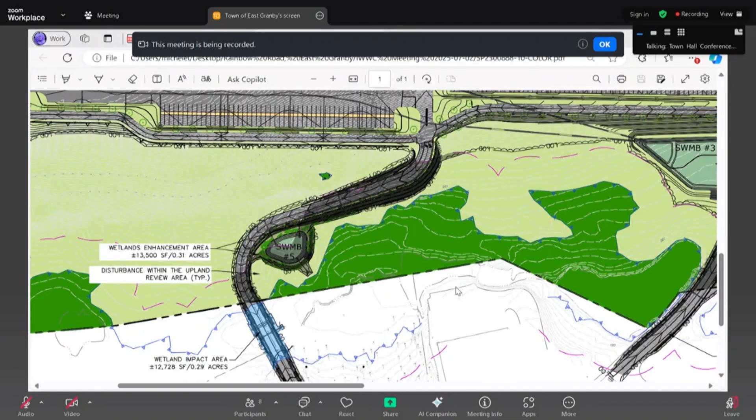So looking here at this driveway location, we do have a few different options of where it could go, but like I mentioned, where we placed it is the narrowest crossing point of the wetlands that we have access to. We did explore a couple options that should be in the application package. Essentially, looking farther plan right here, it's just a wider section of the wetlands.

So for that driveway, we do propose a new box culvert. It's actually 2 barrels wide, so it provides adequate flow, but we also specifically chose a box culvert so that it promotes and allows for free passage of wildlife. We didn't want to go with a pipe system because those can be a little bit more restrictive for wildlife passage.

So that's the main impact for the wetlands there. That's about 98% of the direct wetlands impacts. There's a very small sliver of wetlands impacts on the plan north side. It's associated with a velocity dissipation measure for the outlet of one of our stormwater basins.

Our outlet pipes are strategically placed so that we maintain flow towards the wetlands to maintain their current functions and values. But we did want to provide protection measures at the outlet so that we slow down the water so it's not flowing out rapidly, and allow any sediment to settle, as well as kind of level out the flow so it can convert into sheet flow. So we've got, I think it's around 50 square feet of impacts on the plan north side just to fit in that velocity dissipation measure to protect that area.

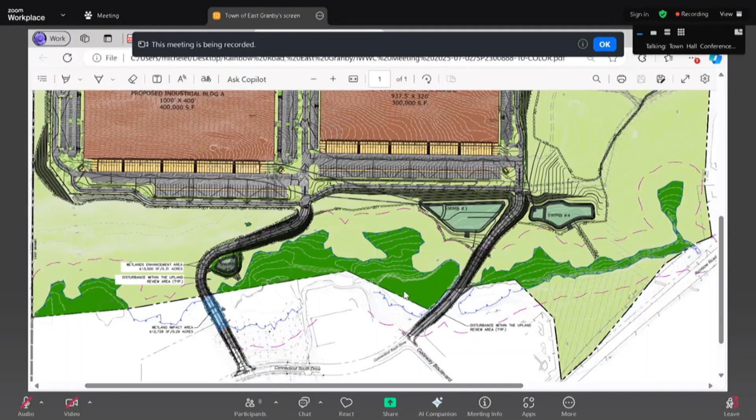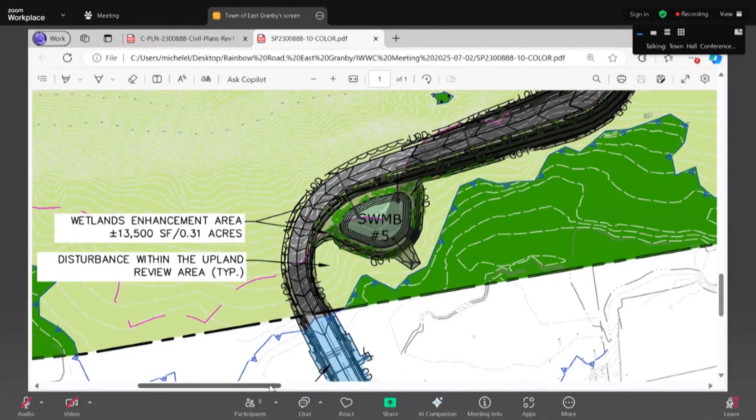And then, as mentioned, we do have some enhancements. Specifically, they're focused around one of our proposed stormwater management basins. It's at the bend in that southern or plan left driveway. So there's kind of that bubble right on the inside corner of that driveway. That's a stormwater management basin specifically intended to manage the runoff from this driveway.

But we chose that area strategically for the wetlands enhancements because it is very close to the wetland resource area, but it also will experience repeated stormwater flow from the drainage system. So we were able to place strategic plantings in that area and select the varieties very carefully so that they are wetland friendly. It can essentially function as an extension of the wetland, but because it has that continuous flow from the stormwater management system, it will really increase the likelihood that this enhancement will be viable and sustainable long term. We didn't just want to plunk an enhancement off to the side somewhere on the site near the wetland boundary. This area really does have that stormwater flow to maintain its viability long term.

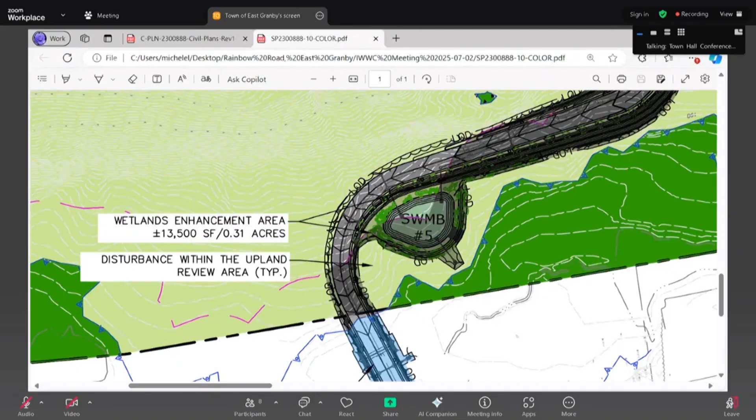If we can zoom out a little bit to see the entire site, I want to touch on stormwater for the site as a whole. So this site does have 5 total stormwater management basins. Essentially, we're collecting all the runoff in deep sump and hooded catch basins. So the sumps and hoods will provide that initial treatment for suspended solids. It's all an underground conveyance system. So it'll flow through pipes into the infiltration basins.

On the front end of those basins, we do have sediment forebays to provide another level of initial treatment for suspended solids. And then through the remainder of the basin will be the infiltration practice, as well as providing the remainder of the treatment in compliance with the Connecticut Stormwater Management Guidelines, the latest issuance, which is effective in 2024, that will provide the adequate pretreatment for suspended solids as well as nutrients such as phosphorus, nitrogen, and similar, so that by the time the water is infiltrated, it'll meet or exceed all the treatment requirements set by the state.

Those basins are sized for all of the design storms required by the town regulations, as well as the state of Connecticut stormwater guidelines. Essentially, that's all the critical design storms up to and including the 100-year. So the increments that we review are the 1-year, 2-year, 5, 10, 25, 50, and 100-year storms. And so essentially, the easiest comparison is that the 100-year storm is a probability of this storm happening once in 100 years. So for comparison, that's roughly 8.5 inches of rainfall in a 24-hour period.

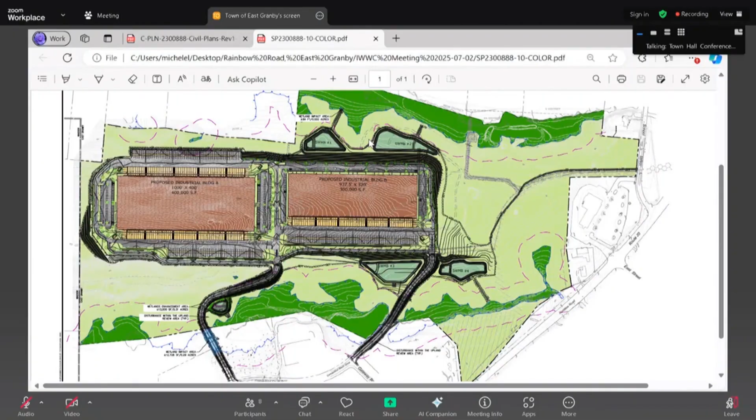We do have lighting along the driveway, so there will be some limited illumination within the wetland and the upland review area, but those lights are strategically placed and kept with shields and to as low height and foot candle as possible so that there's limited spill into the wetland, but we do still provide adequate lighting for traffic safety. We want to make sure it's a safe driveway for traffic circulation, especially the southern driveway with that bend, we want to make sure that's illuminated so it's safe for all users of the site.

We also included a comprehensive landscaping plan. From a wetland standpoint, it's centered primarily around that enhancement area. They are all native species, primarily a mix of shrubs within that area, all able to thrive within a wet foot condition as they would experience within that stormwater basin. There are a few trees scattered throughout that enhancement area as well, primarily river birch and swamp white oak.

There are a number of other landscaping measures throughout the site. Just for order of magnitude, it's close to 300 trees, a mix of evergreens and shade trees. So we do have a number of other site improvements from a landscaping standpoint. Some of the disturbed areas within upland review that are not proposed to be landscaped or hardscaped will receive either a lawn seed mix if it's right next to the roadway or a conservation seed mix on the slopes and some of the bordering areas.

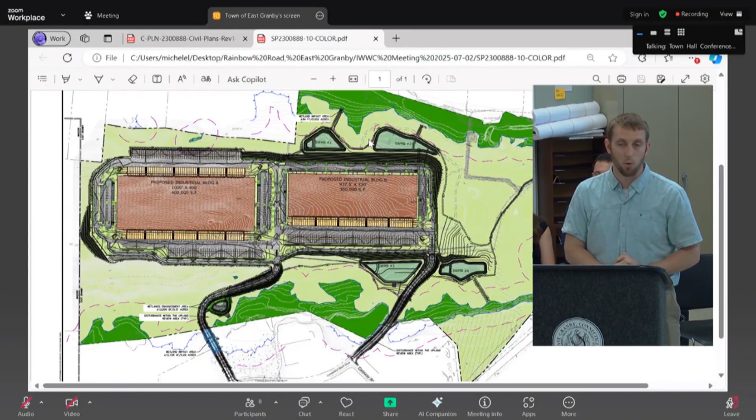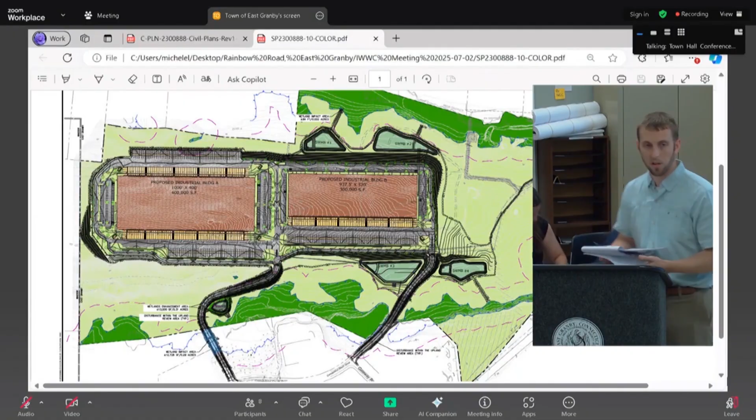Long-term, some of those open spaces and more grassy areas will be allowed to maintain some of that wildlife viability. We did specifically choose a conservation seed mix so that there is the variation in vegetation styles, some wildflowers in there to support wildlife habitat, especially as we get closer to the wetland area. So I believe with that, I would like to pass it over to Tiana to discuss some of the wetland resources.

All right, hello. My name is Tiana Perini. I'm the soil scientist with JMM Wetland Consulting Services here on behalf of the applicant. And tonight I'm going to discuss via the project Rainbow Road, some of the wetlands, their function and values, and our approach to minimizing impacts and also some mitigation.

As discussed, there are two primary regulated resources. Sorry, the plan's going to be a little confusing for me, but if it's actually facing north, it's going to be our eastern wetland, which is a forested wetland with an intermittent seasonal watercourse and a man-made pond, as well as our western wetland system, which includes Sheldon's Brook, associated emergent marsh and scrub shrub and forested wetlands.

Within our eastern wetland system, we do have a noted vernal pool. Again, it is located within that water system. Then we have two isolated wetlands. One, a small man-made vernal pool in the southeastern portion of the site, and then an isolated wetland, not a vernal pool. It's an isolated depressional wetland in the southwestern portion of the site.

When looking at our function and values, the western wetland does have 7 primary function and values. We do have a chart provided in our report. I'm not sure if everyone had that with them tonight. That's a big one. This was in the original packet. Yeah.

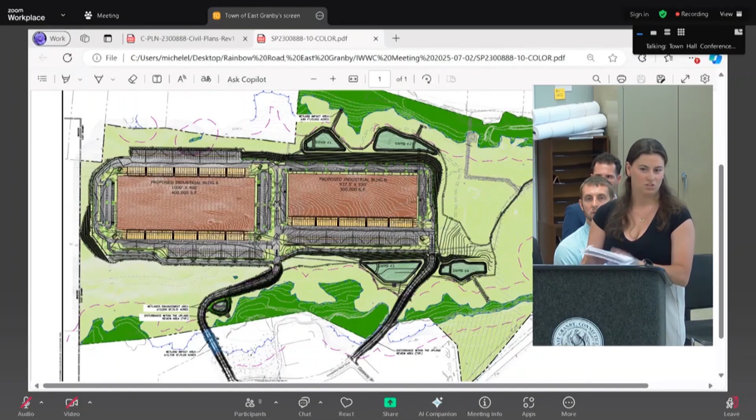Yeah. Want to go through, guys? Sorry, I don't have it shared on the screen, but just to reiterate, it is in the chart, so you can see it listed. If you need me to go into it, I'm happy to go into it. But in the western wetland, we have 5 principal functions. The isolated wetland only has 1 principal function.

These factors for the function values can be influenced in a positive way, such as the presence of multiple wetland types and the presence of the perennial watercourse, while other factors diminish the function, such as the proximity to the existing development, past disturbance, and an abundance of invasive plant species.

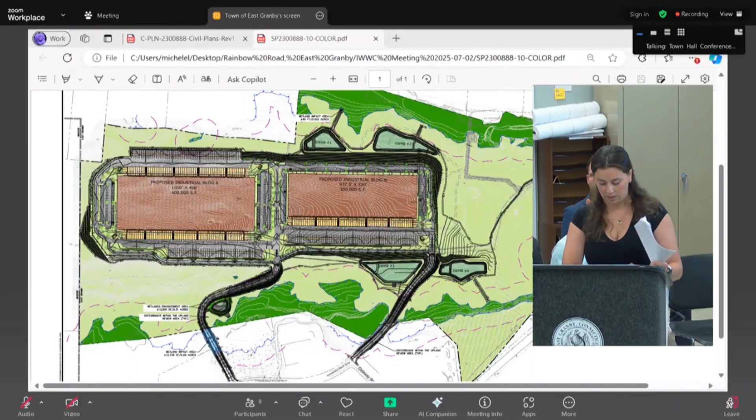When looking at the two vernal pools, we have vernal pool 1, which is our natural vernal pool located within the wetland system. We did find that this was the more productive of the vernal pools, with spotted salamanders and wood frogs. Vernal pool 2 is the small isolated vernal pool that was noted more adjacent to one of the access drives. This is again a small man-made depressional wetland, which did support some wood frogs and breeding, but is not considered a productive vernal pool at this time.

And we did 2 different site visits, as well as trappings, and multiple hours spent there to come up with these answers for you guys. When looking at our impacts, we look at 2 different types of impacts, direct, as mentioned, and indirect. Our direct impacts are, again, only a small portion, about 12,000 square feet, and are associated primarily with one of the access drives.

We do have, as mentioned, a mitigation plan that JMM is working on, and that includes native shrubs that will help restore some of the wetland areas and does at this time exceed the size of the proposed impact footprint. The indirect impacts are ones that are known to most sites: erosion and sediment, vegetation removal, hydrologic changes, water quality protection. With the plans that we have seen in place, with diligent supervision, there is only a moderate risk to erosion.

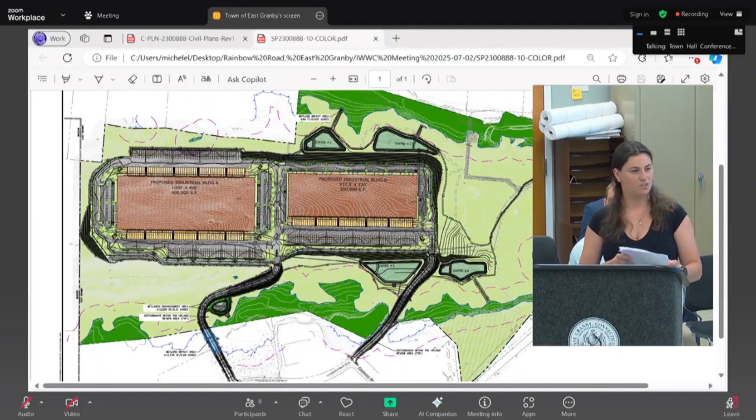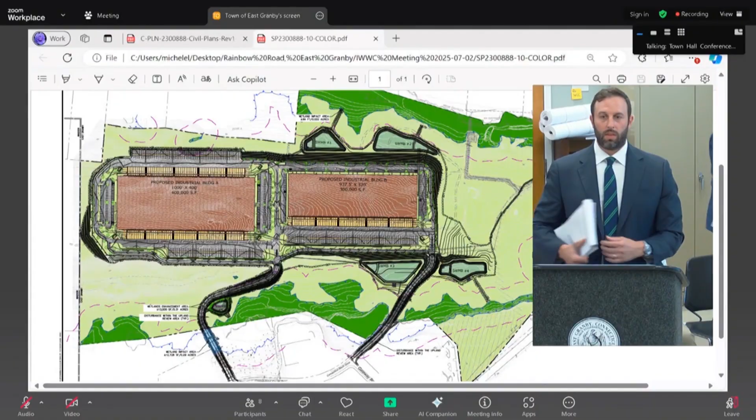So that concludes our presentation. I don't know if members of the commission have questions now. We're happy to answer them, or if you'd rather wait.

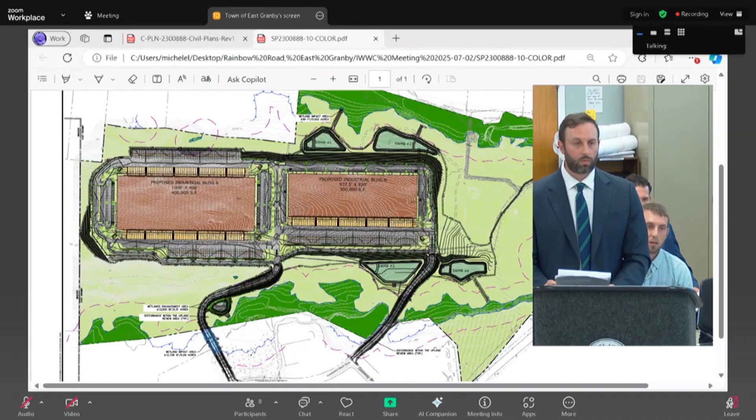So one of the letters received from Robin regarding the questions that have been asked by the town engineer: I read through all the questions that have been asked of the engineering firm, and I saw the responses from the engineering firm as of June 25th. I got through about 3/4 of them, and it seemed that most of the questions, specifically the drainage questions, number 15, 16, 17 A through C, 19, and 20, all said they'd be addressed on the next revisions. Robin said we expect that those would be presented to us by the start of this public hearing.

So we actually just received today, and Tim step in at any point, but we received today a new memorandum from the town engineer. And as part of that memorandum, he proposes several conditions of approval, and I don't know if you have this in front of you, but I wanted to read the final. No, the latest we had received was from June 30th. Okay, so this is dated today, July 2nd.

So it came in, I think, just a few hours ago, so we obviously couldn't get it out, but Tom Grimaldi, the town engineer, is on the call, so he's available and can answer questions and walk through the most recent memo that he provided, which is the one that he's speaking to.

Okay, so we don't have those answers yet, so we need to hear those answers. Yes, I think the plan would be for you to get them verbally. Yeah, because we couldn't get it out in the packet. If I could just read the final paragraph of his report, because I think that could be helpful, and then

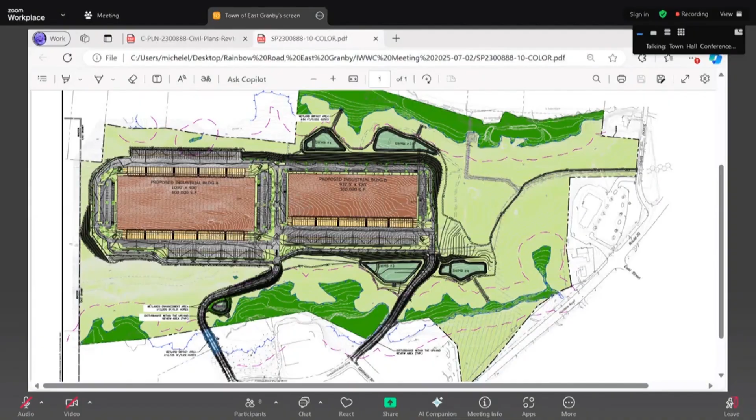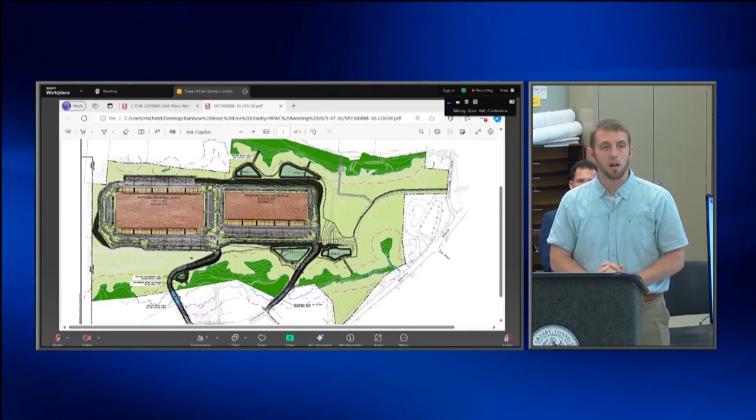However, where that basin is located and the design of it currently, we were able to just pick up the floor of that basin without any impacts to the upland review area or the wetland resource area as a whole. Basically, we had enough elevation to play with where we can just raise the floor slightly. The pond still holds the appropriate amount of water without increasing flows off-site. So you don't have to change the dimensions even though you're making it more shallow? Correct. We actually got better infiltration results. Okay. In that area.

GEI wasn't able to reach that area previously because it was pretty wooded. We were able to go in there with an excavator and carefully pick our way through trees to create some space for testing, and we found a very nice pocket of sand. Previously, it was kind of like a sand and silt mix in some of the areas more on the east side, which is the plan right. As we go farther plan left, we get into more of a sandy, gravelly mix, and where that basin is located, it's very firmly within that sand mix. We actually got field tested rates in excess of 10 inches per hour. So it's a very clean and suitable material.

So I'm not a soil engineer, but I understand geometry. And what you're saying is that you don't have to change the geometry, but the soil permeates better so you can get better drainage without having to change the footprint of it. Correct. Okay. We do have elevation to play with too, because the site is something like 15 feet higher than the floor of that basin. So we're able to pick that basin up as a whole if needed as well, without increasing the footprint extending

out towards the wetlands. Essentially on this site, where we're putting the building is on kind of a knoll. The wetland resource areas are notably lower in elevation. We have something like 10 feet of grade change between the edge of the parking lot and the top of the basin. So we have the ability to slide that basin uphill towards the building, pulling it away from the wetland, and still achieve our target of bringing the floor of that basin up.

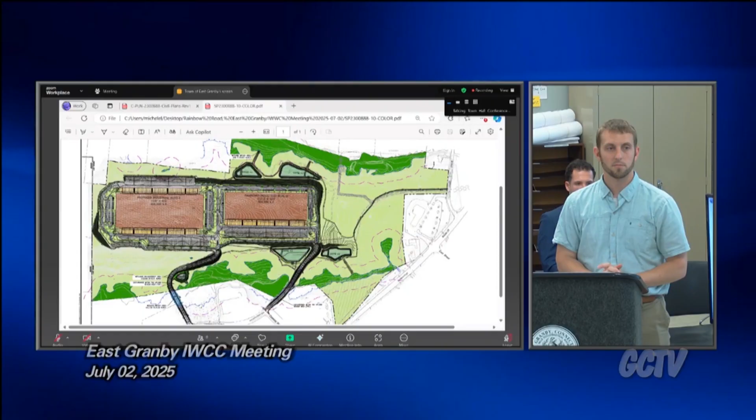All right. I had another question related to the wetlands. Again, what the engineer was speaking, that the goal is to have a net zero change. And when you were speaking about the different years and the successive storms, we can all imagine that we've had a lot more 100-year storms lately than we used to. But you spoke that the design points were reducing the outflow from the current stuff.

So, correct. That's not really net zero. You said like 10 to 60% reducing. So could that have an impact on not feeding current existing wetlands that are outside of that? You understand what I'm asking? Like, we're looking for net zero, right? So a reduction might seem like it's better, but if you're taking away water from other places that are supposed to be watered, how does that help?

So the regulations require no increase. We have to either match or reduce the rates. So as you can imagine, with a site of this development, it's very tricky to truly balance. Without getting into the details, a lot of the time what happens is we can get one or two of the design storms to match, but then the others are either a significant increase or decrease. So in order to get all of the design storms to comply with the match or reduction, most storms end up being a noticeable reduction.

Here specifically, the approach that we took is, we have some larger wetland resource areas here, certainly not receiving flow just from this site. Sheldon's Brook has a watershed in tens of square miles, if not more. The wetland resource area on the eastern side of the site, we didn't analyze the full watershed of that, but certainly that's a sizable resource area as well. So with the net reductions that we're proposing, it's really negligible on the functions and values of those.

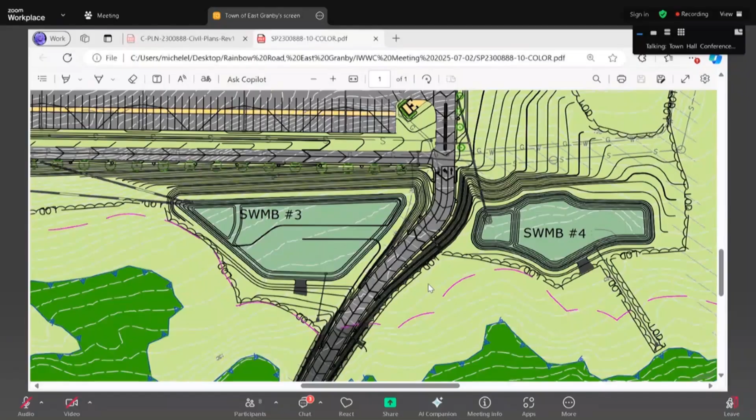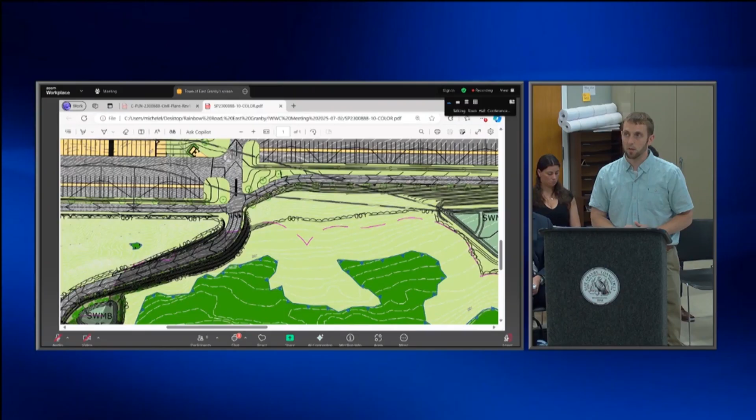That one does have a specific advantage in comparison to the other 4 in that we are proposing a substantial improvement in vegetation around it. So although that is a little closer to the wetland resource area, there's far more vegetation being proposed within and around that basin that'll drastically improve the treatment levels achieved for some of the more problematic items to treat for, such as the nutrients and metals.

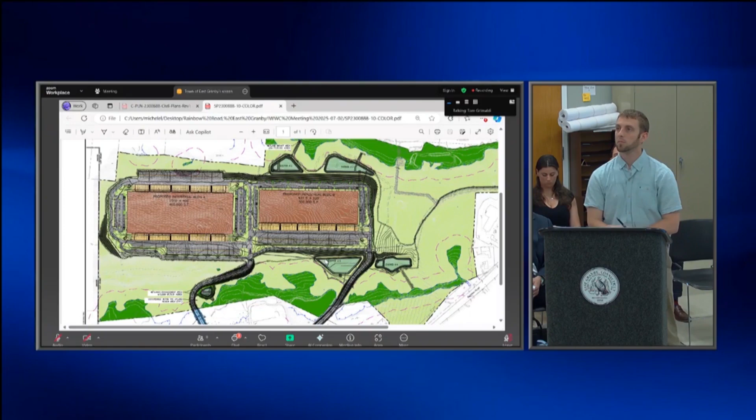Hey, Tim? Yes. Tom Grimaldi. Can you just give him a brief explanation on the water quality volume and how that's addressed in the sediment forebays? That would help a little bit for them to understand the treatment per the 2022 Stormwater Quality Manual, which I will say is an extremely rigorous requirement with the latest revision. It's gotten much more difficult to design these basins. They're larger. They require more testing in the field and not in the lab. So if you could just give them a brief overview of the water quality volume and how that's addressed, that'd be great.

Sure. So as Tom mentioned, in the manual there's a handful of major design criteria that we need to consider. One of the main ones that we already touched upon was ensuring that we, the technical term is attenuate the peak flow rates, essentially verifying that we're not sending more water off-site. That's one of the main measures. One of the other ones, as Tom is talking about, is the water quality volume. There's a set guideline on how to calculate what this volume is, but essentially, the calculation is centered around ensuring that we account for all of the impervious areas on the site and that we are capturing that water and treating it.

The science behind it is that when a storm happens, the paved areas may have some level of pollutants on it, whether it's buildup of sand and sediment. It could be a little bit of hydrocarbons from a small fuel spill or something similar. As the rain happens, those contaminants are concentrated and flushed in what's called the first flush. Every state is a little different in what they consider, but the water quality volume in Connecticut is calculated to assume 1.3 inches of rain over all of the impervious areas on site. So essentially what we're required to size the treatment devices for is assuming 1.3 inches of rain hits all of the impervious areas on site.